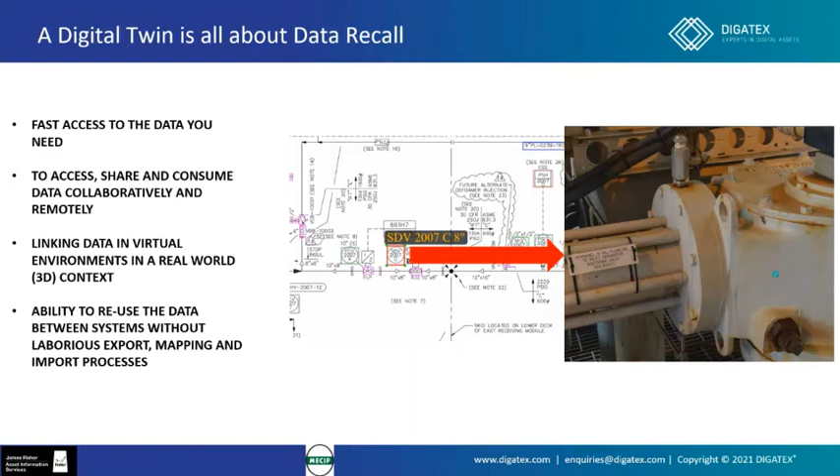So what comprises a digital twin? Out on our platforms and facilities we have a number of elements. We have drawings and documents. These drawings and documents are layouts, drawings, schedules, P&IDs, isometrics, you name it, we've got them, in multiple formats. But then we have databases and spreadsheets.

Engineers love building asset databases and spreadsheets. So you'll have hazardous area schedules, critical equipment schedules, alarm and trip schedules, etc., and all that data is normally in some sort of database.

And then we have a whole lot of 3D models, and these could be CAD models, where CAD stands for computer aided design, used by engineering contractors to design and build the asset. There's two huge benefits they get from it. Number one is space management, because they need to make sure nothing clashes when they get to site. Because if you've got a 12-inch steam pipe, it's very expensive to move it if it's going to clash with a piece of equipment. The other one is material management. If you can get the materials right, you can be very, very efficient during construction of the asset.

And of course, when you get into operations, this plant is changing constantly, and not everybody updates their CAD 3D model to as-built and then maintains it. So that's where technologies such as photogrammetry, which my colleagues Ruth and Nick will talk about later on, come into their own, where we can take a digital photo that can be used to find your way around the asset. And of course, there's laser scanning as well if you want the detail, and the technology's really moved on. We'll talk about that a bit later on.

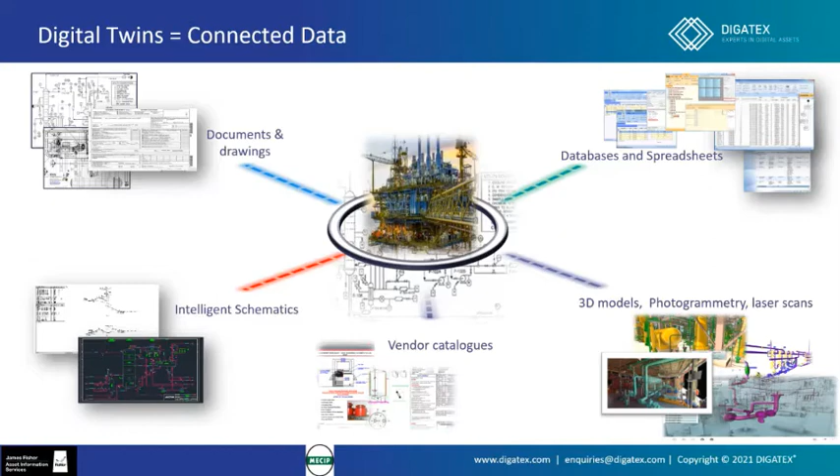And then we do, of course, have some intelligent schematics. You have intelligent P&IDs, intelligent isometrics, etc. So that's the landscape of engineering data, and some people will call that a digital asset. And what the digital twin does, as shown in the middle there, is it links this all together. But it's a massive challenge to be able to extract the data so you can create that linking. That's what we'll talk about just now.

But of course, once you've done that, it all feeds up into the overall digital twin of the asset, because you need to maintain the asset. And with that, you need to continually create work packs. You need to be able to tell people what you do. You need to group equipment together, and that needs the engineering data to be able to do that. Material master or equipment management is a really, really important part.

And we'll talk a little bit about duplicate items later on in the presentation. If you have duplicate items in your store, it's costing you more to store them. It's costing you more because you're going to buy more equipment, which means more equipment has to be manufactured, and that's increasing your carbon footprint plus your costs. So focusing on that, you can have some significant savings.

And then there's the engineering aspect. Engineers need to check, for example, if a pump has failed and that pump is obsolete, then engineering need to check to make sure that whatever's been proposed will do the duty and do it safely. Then there's the inspection. We see a lot of computer programs coming online now about 3D inspection management.

There's a lot of work being done in the risk-based inspection area, where we'd really like to be able to take an isometric and mark it up and say, here's an inspection point, here's all the weldolets, here's all the welds, these are the flanges. But when you've got dumb PDF isometrics, it's very difficult to do that other than manually.

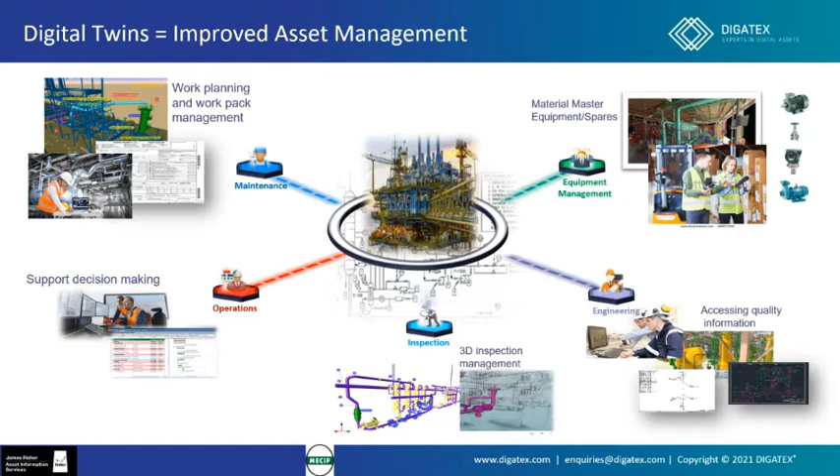We're with a big Malaysian operator this morning. They were talking about their 7D system. So things are progressing very rapidly in requiring granular access to data. Their question to us was, they've got thousands of PDF P&IDs - how can we link them into their 3D model so they can have smart access to their granular data? And we'll talk about how we do that just now.

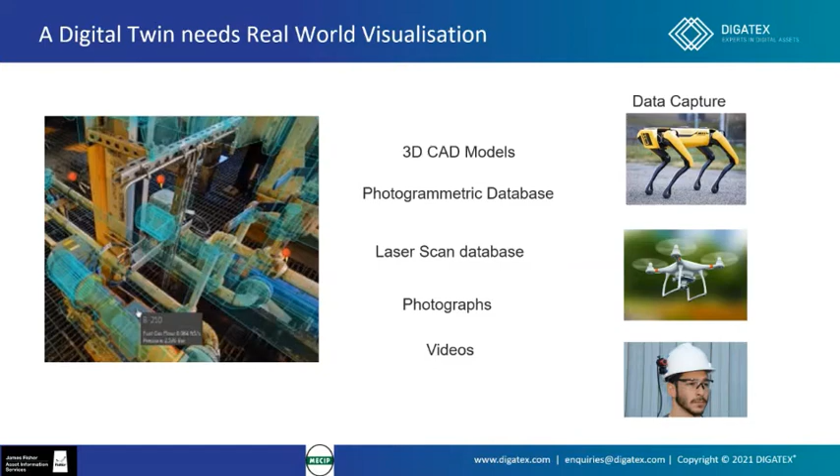And that brings us to photogrammetry. Why would we? That's been around for years and years and years. It's not a new technology, but there have been some massive advancements. We can now do acquisition very quickly, so we can capture a plant very quickly. The updates can be done by the operator, so you don't need to call back the company that created the photogrammetry model for you. But the big plus is it provides an as-built view.

And certainly I did quite a bit of work here in Australia with Woodside a few years ago. And what they found was that when they started looking at the photogrammetry model, they picked up safety issues. And that was a huge advantage to them. It wasn't designed for that.

They captured it in order to do maintenance, but they found there's a very good side benefit. And of course, with these operations or these plants being remote, it means that you can view this in your office or in your home as you are sitting right now.

And of course, we can now link the documents and the data to the 3D model, and we'll show you that just now. Of course, that gives a huge advantage, because if you're looking at this particular valve in the 3D model, photogrammetry model, you can click on a button and open the P&ID, the general arrangement drawing, or the loop diagram, whichever drawing you want to have a look at. And that's what brings it all together and makes it very, very good.

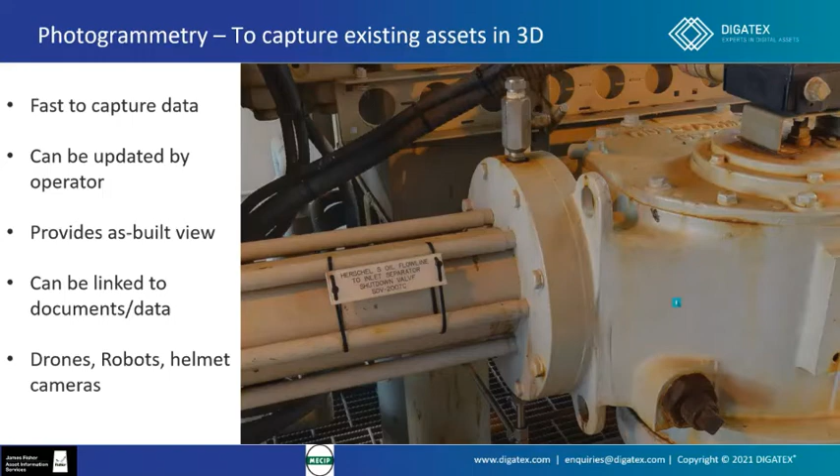And of course, with the latest technology, I'm sure Ruth and Nick will talk about it a bit later on, you can bring laser scans into this as well. So you can combine this all together, so you're not locked into a single technology.

So just as an example, if I showed you my mobile phone, you would look at it immediately and say, yes, that's a mobile phone, and it's an iPhone. Now, how would you know that? Well, you'd know that because you've probably seen one before, you probably even got one. And that's the same as what we're doing with machines.

We're teaching them, using artificial intelligence, to identify objects. So if you looked at a P&ID, you would look and say, oh, there's some lines, there's off-sheet connectors, there are valves, there are instruments, there's equipment. How do you know that? That's because you've seen it before. We're doing exactly the same here.

And machine learning is the subset where we use advanced statistical methods to speed up the process and make it much more efficient. And deep learning is the subset which makes the computational multi-layer neural networks feasible. Now that's very, very technical, and we won't go into it in this presentation, but it's certainly one of the techniques that we use.

All right, so what is the value proposition here? Because if we can't do anything quicker or cheaper, as we know from our opening slides, then we're not going to get approval to go ahead.

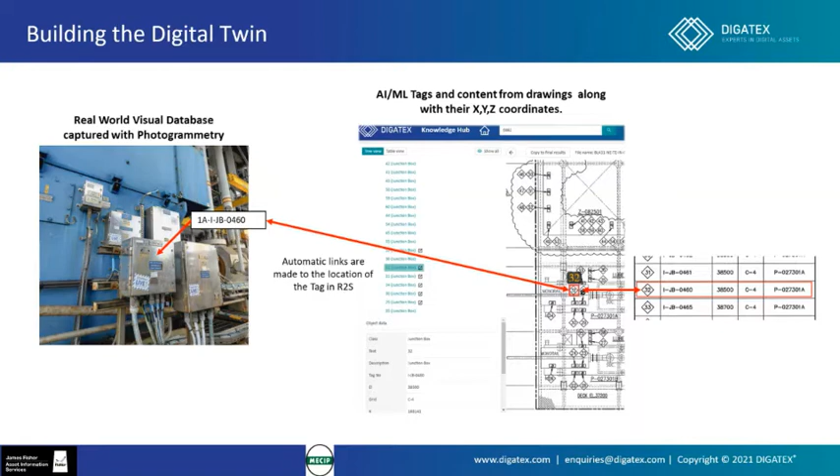We can also nowadays do this with P&IDs. So here's, for example, a shutdown valve, SDV 2007C, and you'll see on the left-hand side, in those square colored boxes, what the machine has identified - the shutdown valve, a flow control valve, the lines, all the objects it's been told to go and identify. And that could be a scanned image, a dumb PDF, a JPEG, any format you like. If it's an intelligent PNID, well, then we've got more data we can use, but it doesn't have to be.

And on the right-hand side is an image of that shutdown valve, the same one, SDV 2007C. So you can see now, you can go very quickly, start off in the Photogrammetry 3D model and go back to the PNID, or vice versa.

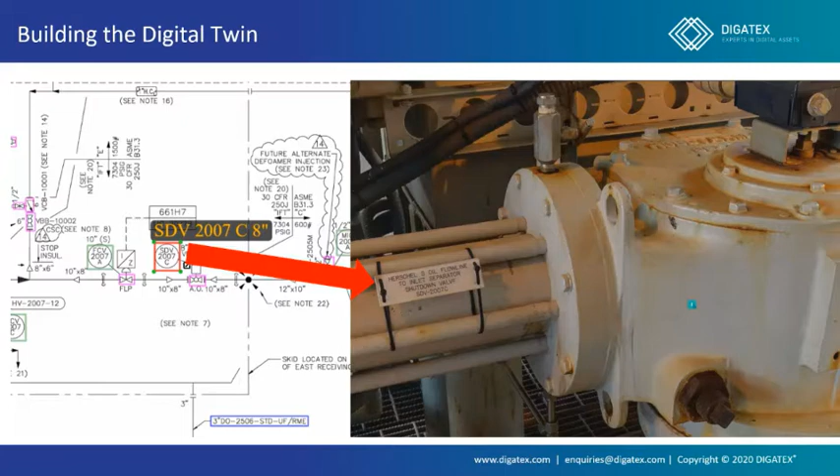Now, this is a really important slide, a very simple drawing. It's called an isometric, and it was just a dumb PDF isometric. You'll see in the top left-hand side that the AI platform has detected welds, weldolets, elbows, lines, off-page connectors, etc., and flanges from this dumb PDF drawing. You'll see that callout where the machine has identified that flange because it's been taught how to do it. It's identified the endpoint, so we can navigate to the next drawing.

You can even put inspection points onto this dumb PDF isometric and number that inspection point as you wish. And here's the crux of it all: the AI platform has extracted that data. So we've taken an unstructured PDF document and created structured data. You can see there's the fluid category, the diameter, the area, etc., all held within the database in the cloud. So we can now repurpose that data, for example, to go and do inspections, to go and do maintenance, do whatever we want to do.

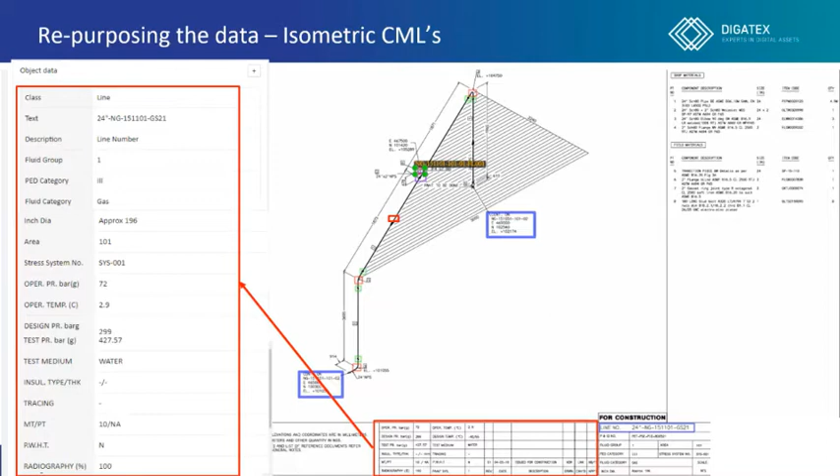Here's a case study taken from a major EPC, Wood, where phenomenal savings were made. This is a really tough project that they had executed in the Middle East, and they came to the end of the project, and the client wanted all the data into their smart system. Of course, all these drawings had been done over many years because there was a lot of unrest in the area and multiple contractors had been involved. There were different tagging systems, so it was very complex. They had estimated it would cost $370,000 US to carry out this piece of work to extract the data, and the time they expected to take was about 50 weeks. Using AI and machine learning, it was executed in 4 weeks for a lot less money.

Another one from Wood is this one, where this is a PNID once again, and you can see the colored boxes is where the AI platform has identified items, using artificial intelligence to find those items. But more importantly, if you look in the bottom left-hand box with the red square around it, you'll see that the machine has said, this is a pump PBB 7305, but it's also got some data in a table at the top, so I'll extract that as well. So now all together in the database underlying the AI platform in the cloud, we have the tag number, the description. It's gone and looked at the symbol library to say this is a double acting diaphragm pump. We've got the capacity because it says so in the box at the top, and it's got one spare, and the material is stainless steel.

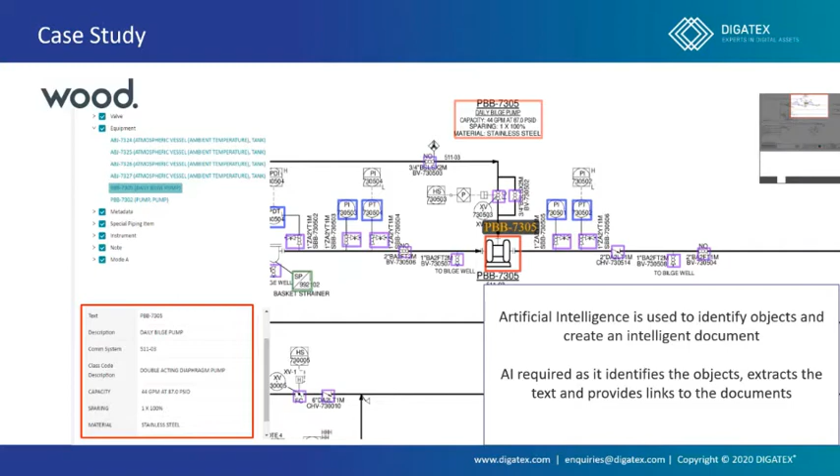So what we're doing is taking this dumb data and making it intelligent and making it available for reuse. That's real, true digital twin availability.

Material master data is notoriously difficult to search because the material master data in the ERP system is normally just text, free text search, which has got commas or semicolons or hyphens between it, and is very difficult for the human to search. So we have used our AI platform to enable finding of duplicate entries.

For example, the top 3 entries there, I've just hidden the operator names for confidentiality reasons, but the top item has got a part number, which is in the middle column, and you'll see that those 3 items all have the same part number. So now you've got the opportunity to say, well, if that's the same operator, those items are actually duplicate items.

And that's really, really important because duplicate items are very difficult to find normally, but they're very, very expensive as well. You've got to store them, you've got to maintain them, you've got to count them every year, and it means that you're ordering excess stock. It's a huge opportunity for cost saving.

And also the ability that it gives you is to be able to share spare parts between operators. Australia is doing this between Chevron, Shell, Woodside, Inpex and Santos. The UK have started with Spirit Energy coming on board, BP, and a lot of other operators are looking into this as well. So huge opportunity to drive down the cost.

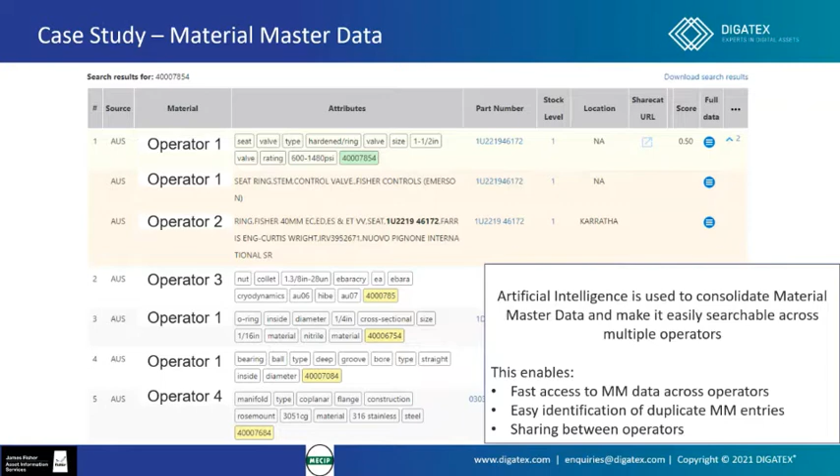All right, so that leads us on to the linking of the digital twin to the 3D model. And I'm going to ask Ruth now to talk through the case study, real life case study using a tier 1 operator where significant benefits have been achieved. So over to you, Ruth.

The support teams for these assets were onshore in Luanda and in the UK, and physical access to the site could only be carried out via routine boat trips at certain times of the week. Levels of people on board were limited by bed space, as is usual, and like everyone else in recent times and through all of last year, travel was further complicated by COVID-19 restrictions.

So as well as these travel and access challenges, there were also challenges around the vast levels of unstructured but valuable data and disconnected management and operational systems. This meant that a lot of time was spent looking for information and then ascertaining whether that information was actually accurate when it was found. Can we move on to the next slide, please, Richard?

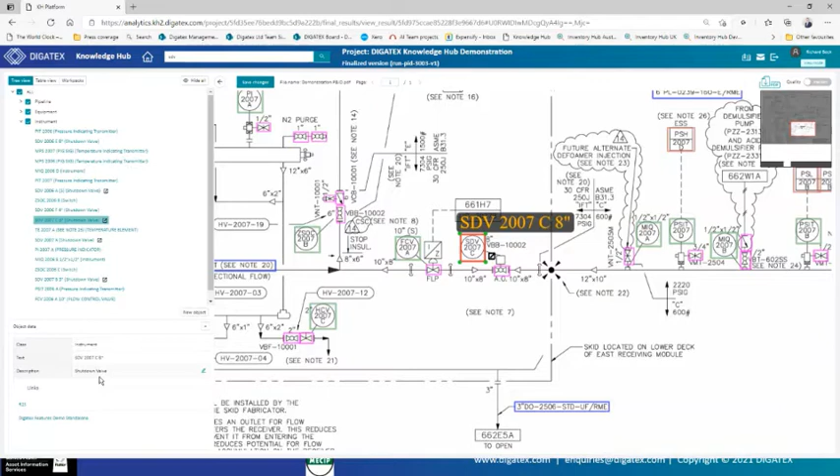In this case, we've just extracted 3 pieces of information. It's an instrument, that's the tag number, and the description. We could, of course, extract a lot more data if that was required.

And then what about repurposing of the data? Well, here's an example of a work pack, a very simple work pack that's been put together to go and maintain this particular item. And what we can even do is allocate parent-child relationships.

So there's the parent in the purple, I'll just zoom in a bit, and those are the 3 children, which gives us fantastic capability using a dumb PDF drawing to be able to go and find this information so quickly.

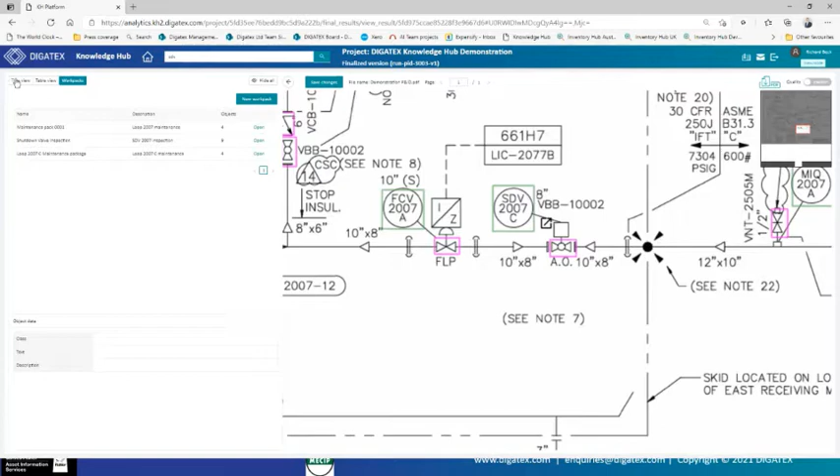So if I go back to that valve now, I can actually have a look at this within the 3D model, because I would have now understood what's going on in the PNID, or maybe I want to look at other drawings. As you can see, if I click that button, you can see everything that's been identified by the AI platform. And I can click a button to download an intelligent PDF if I wanted to use it on site.

But what I can do is click on this button, and it will open up the 3D model, photogrammetry model, and it will zoom to that particular item. You will see that's SDV 2007C.

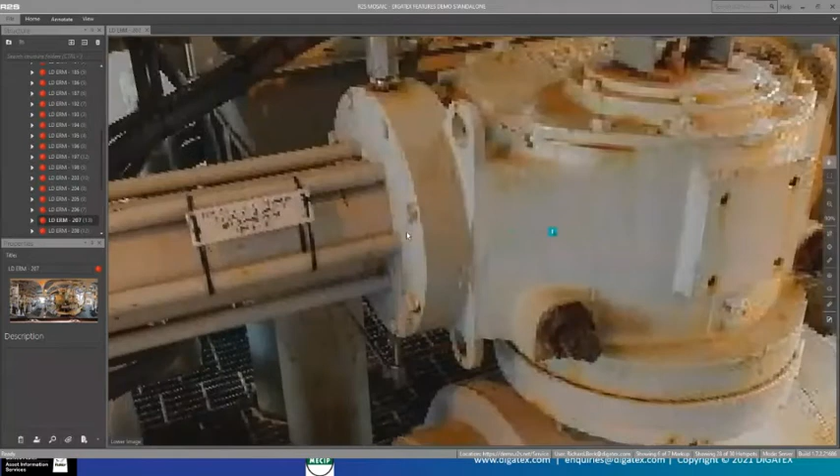Now, the advantage of this is that this is really as built. This is what's out there on this platform right now. And you can see the quality of that text - you can read that nameplate very, very clearly.

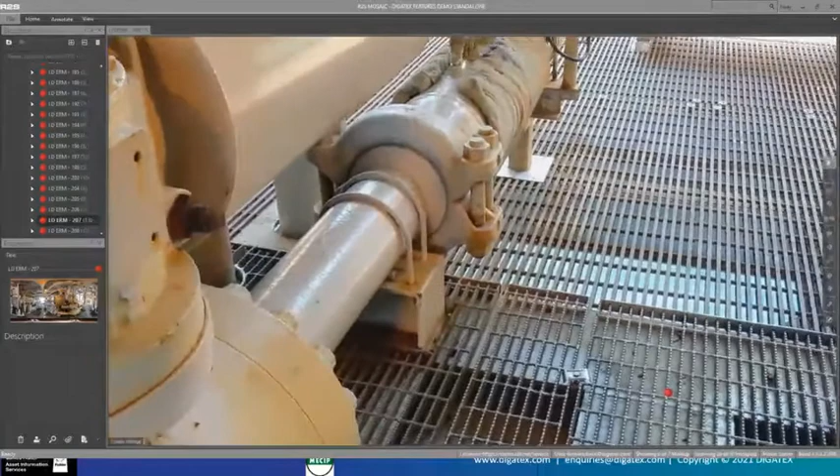And I can now zoom around or swing around, and I can have a look to see, oh yeah, I've got some laydown area to lay down this big heavy valve, and what level it's on, do I need a crane, etc. So that's showing you going both ways - you can go from here back to the 2D drawing as well, which Nick will show you just now. But that's very quickly showing you the power of the digital twin.

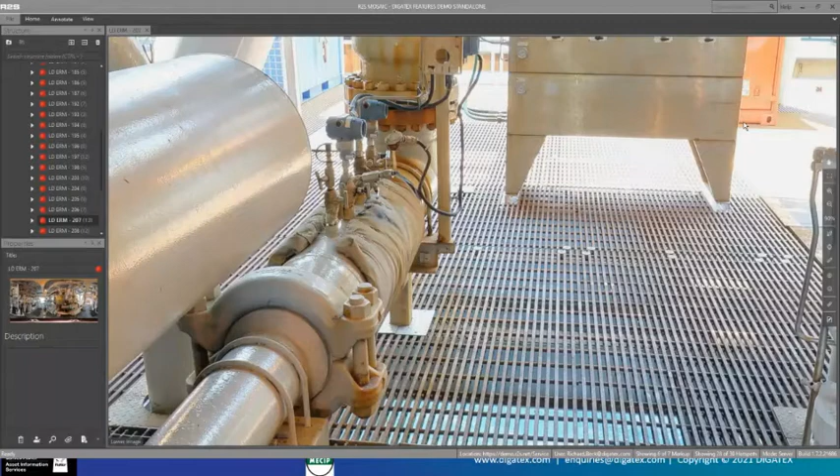So for the last part of this webinar, before we go to the questions, I'll hand over to Nick to wow you with some really, really impressive 3D technology.

Thank you very much, Richard, and hello to everybody on the call. I'm just going to share my screen.

So yeah, what I'll be doing today is just giving you a quick demonstration of some of the different sort of capture methods and functionality that you can expect within a digital twin.

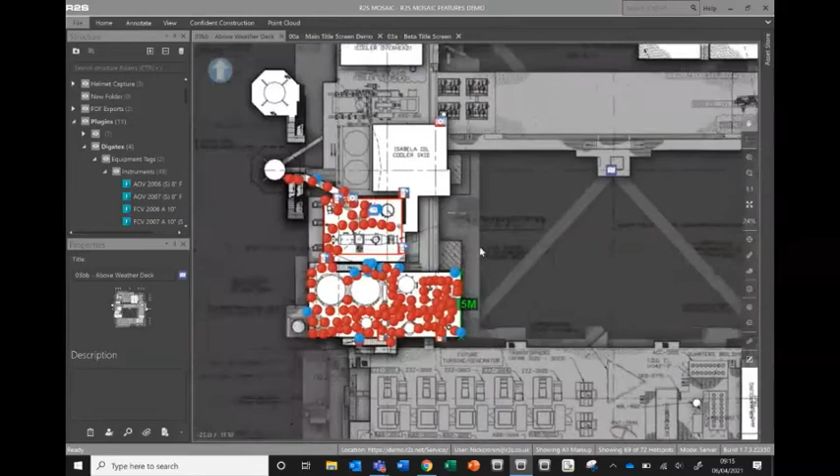In this first demonstration, I'm going to be moving through this main window here, and I'll be displaying photogrammetry and what that sort of looks like. So in this first example, we'll be moving through these red spots on the deck as I hover over them. You're going to get the pop-up window that gives you an example of what you're going to be looking at.

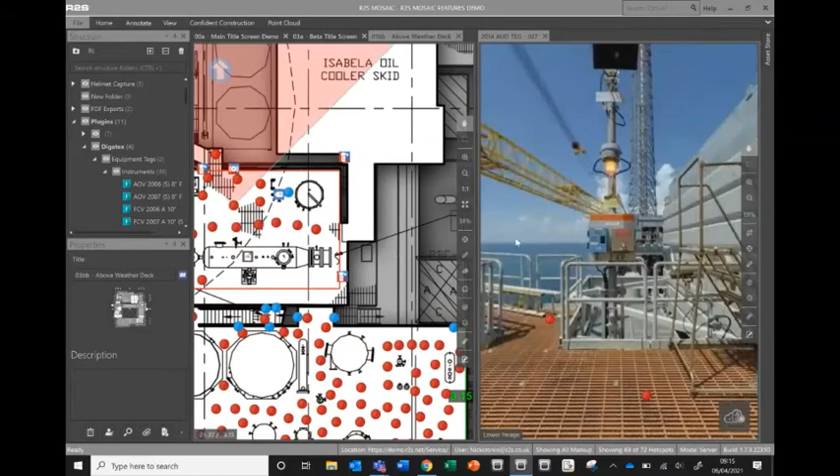Now, each of these points is a 360-degree image that's been captured on the deck of this facility. So we click down onto it, the screen is going to split into two. On the left-hand side, we have the top-down plot plan view, and on the right-hand side, we have the photogrammetric capture. So in photogrammetry, one of the main advantages of this capture method is the extreme quality of the image.

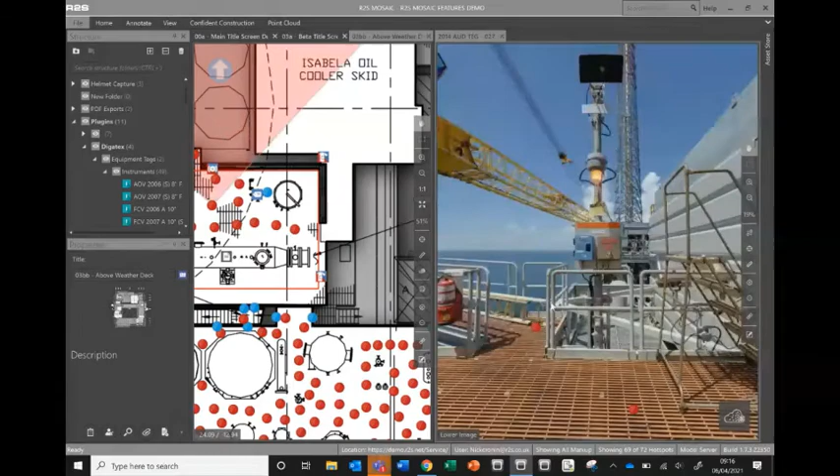You've got great depth of clarity there and the ability to read the signage and the text as we come in and out. The images are also captured at multiple exposures, so you're going to be able to change the brightness in either extremely bright sunny days like this, for example, so that it's not too washed out with the sun, or in a dark area as well. You're going to be able to increase or decrease the brightness to get a better look at the area that you're working in.

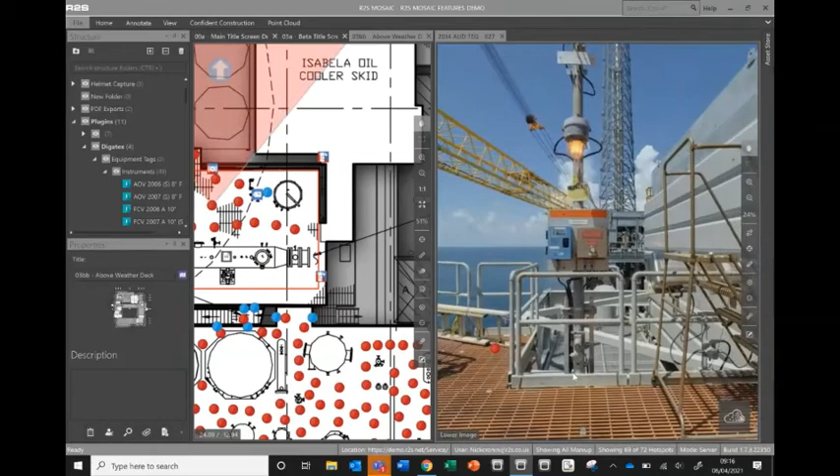So again, the ability with photogrammetry is to really give operators the sort of extreme depth of knowledge and immediate clarity on the site that they're going to be working in. It's great for familiarization purposes, getting to understand a site, or perhaps being able to completely avoid a trip at all by being able to visit and walk around in that full facility without ever leaving your office or your home space.

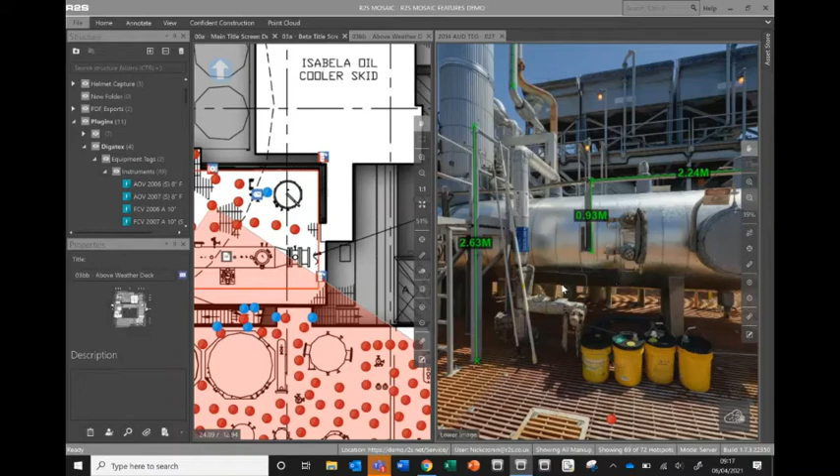One of the other benefits of the photogrammetry method is that you have the ability to take measurements within the images. This is possible because each of these red points is actually one image on top of another. You'll see here as we toggle between the lower and the upper image. Because we know the difference between one image and the next, we can create points within the image and then draw lines between the two of them to give you an estimation of the distance between the two points.

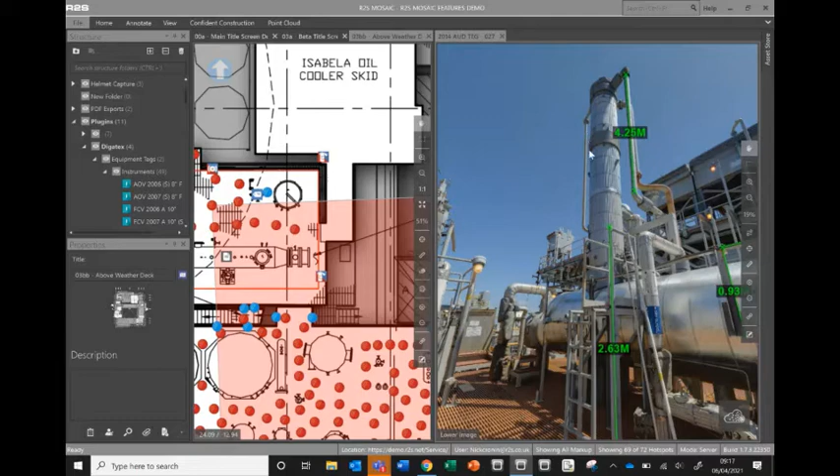Again, this is going to be useful in the creation of work packs. If you're going to be moving equipment around the site and you need to work out if it's going to be able to pass through a certain space, if you need to work out a specific laydown area, as Richard has suggested, or indeed if you've got a measurement that could be either hard to reach or impossible to capture otherwise.

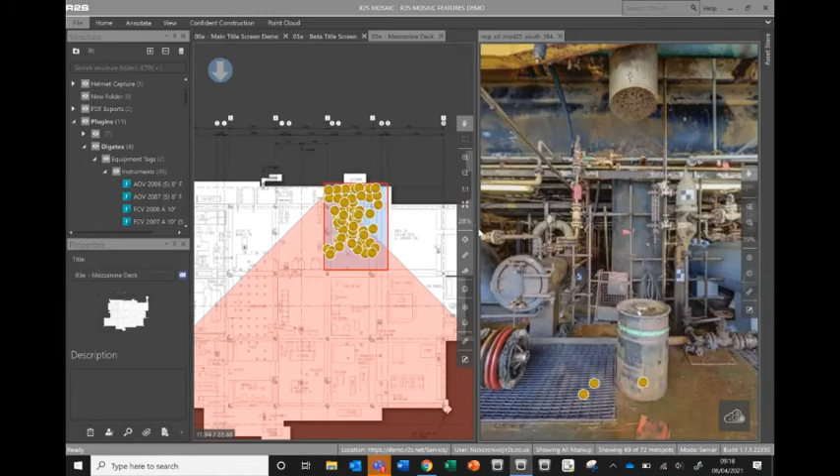Now, that's just an example of the photogrammetry idea, but within the digital twin, I understand that operators don't want to be tied to one specific data set. So you've also got the ability to build in the laser scan data as well, and point cloud viewers as well. So now as we click down onto these yellow spots, I'll be able to just talk you through these.

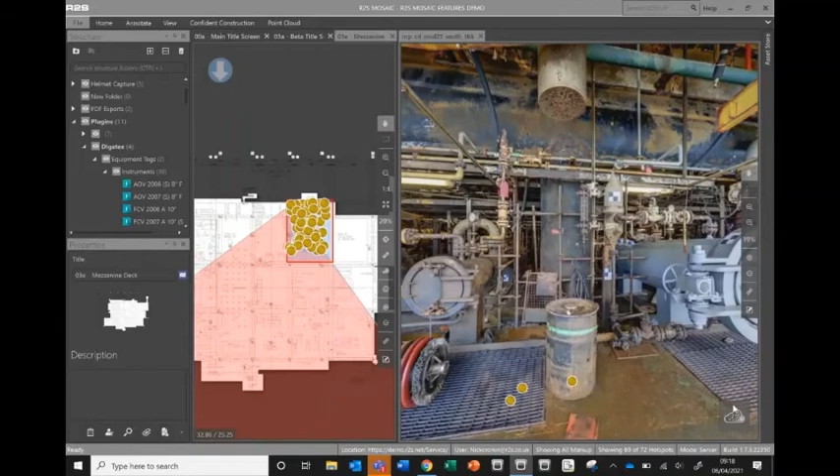So this is an example of a laser scan survey that's been carried out on an asset. Now as the laser scan is being deployed, the camera will take panoramic imagery, and this can be built into the digital twin to give you a viewpoint similar to the photogrammetry that we were just looking at. And then this can also be built in and compared with the point cloud data that has been pulled out of the laser scan. As I click on this icon just down here, we're going to get the image popping in within the digital twin, and you'll see that start to auto-populate there.

So then in this situation, you've got the best of both worlds. You have the freedom of movement and the ability to measure within the point cloud here. And then you've also got the clarity of the image from the panoramic viewpoint that's been taken as well.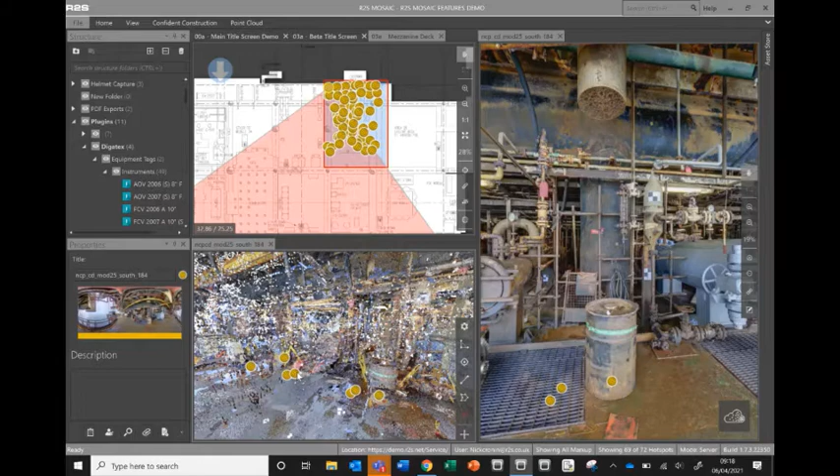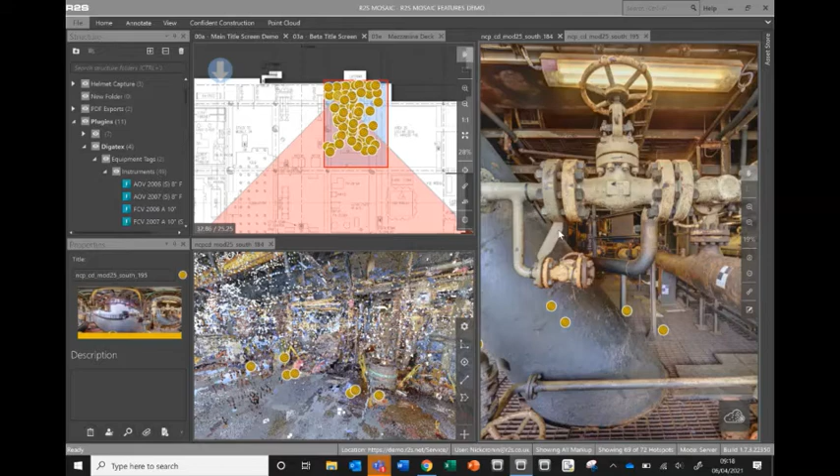You'll see as well that the points that have been captured are available in both, and as you click through them, the point cloud will open in the same location as the spherical as well. So it allows you to compare across the two of them. If you've got two screens up whilst you're working on the asset as well, you're going to be able to look at both of them and have the ability to compare through the two.

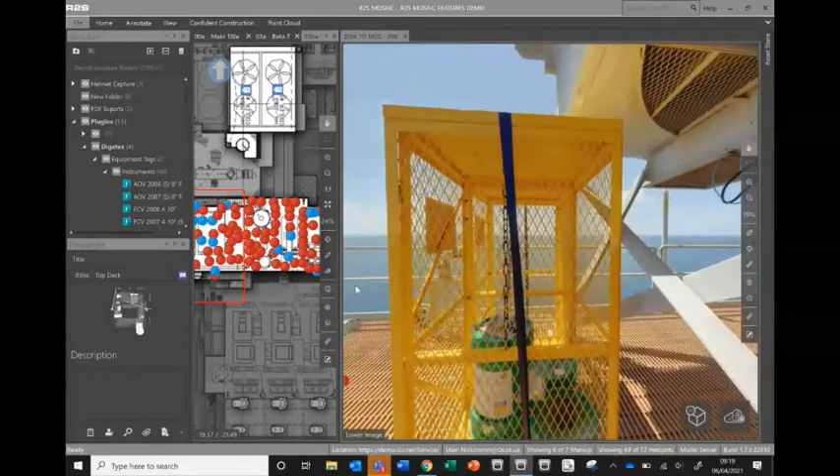Another example of data sets that can be brought into a digital twin is the ability to work with 3D models. In this example, as I rotate around the photogrammetric image, you also have the functionality of being able to overlay the 3D model into that, if there's an XYZ coordinate set available.

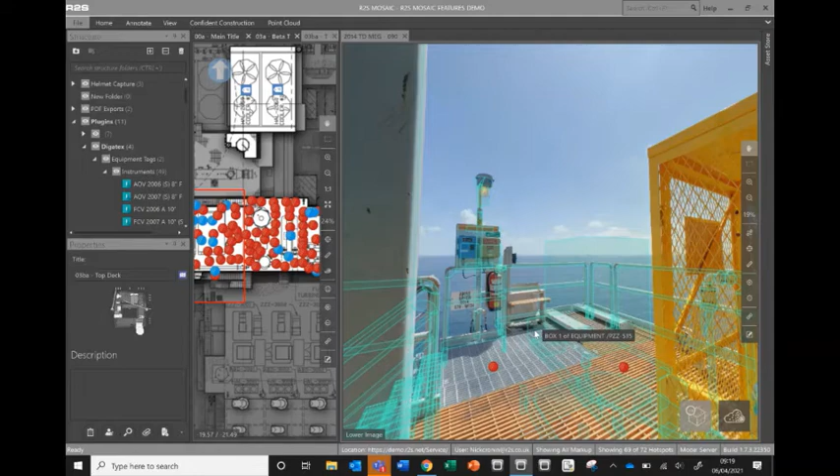What's happening here is that the 3D model is being pulled through and the intelligence is being overlaid onto the photogrammetric image. As I hover over each of the individual parts in the 3D model, it's going to pull through that information, and you're able to compare and contrast the knowledge with what's in the image. So you've got the number tag here, ESD 86300, and you can see that comes up on the tag as well.

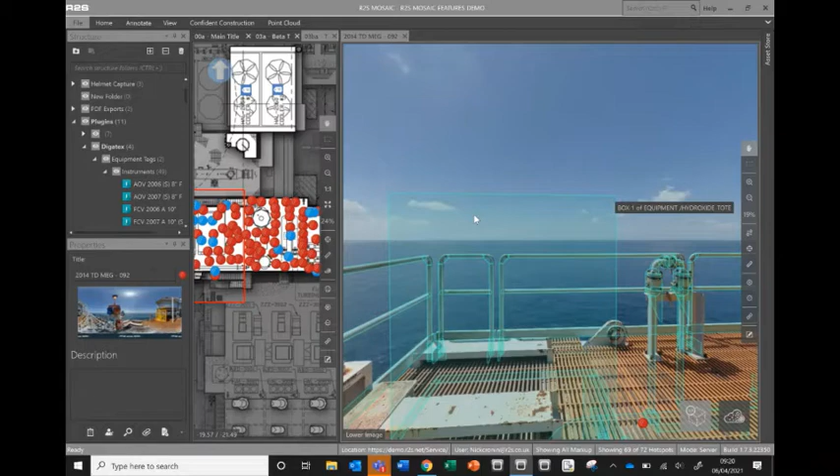This is useful because it allows you to compare and see the as-built environment against what you have in the 3D model. For example, here there's a box of equipment that has either never been placed or has since been removed, and by comparing against the actual as-built model, you get a greater depth of knowledge.

Within the photogrammetric options for the digital twin, and indeed the laser scan, kits can be provided that allow operators to capture individual elements and areas of a site, which means there doesn't need to be a full deployment to keep the model evergreen and give you confidence in what's being looked at within the digital twin.

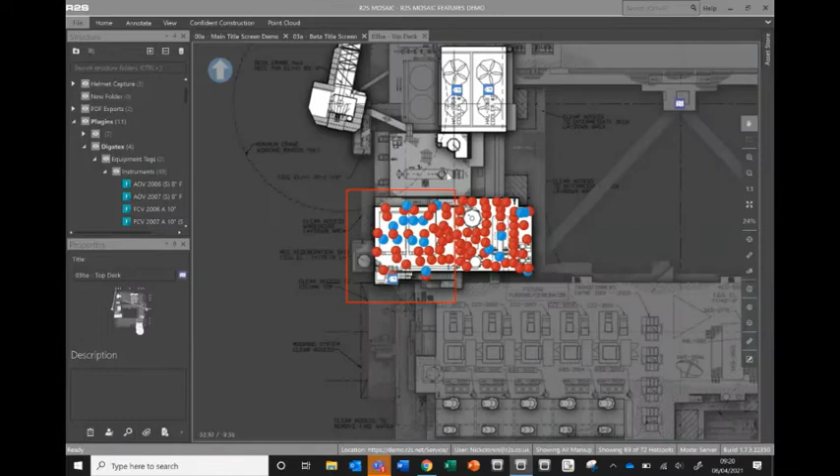But the real benefit and ROI of the digital twin starts to come back when you're able to build in more intelligence and information into the images you've got there, and that's when it really becomes invaluable in creating work packs and increasing familiarization within a site.

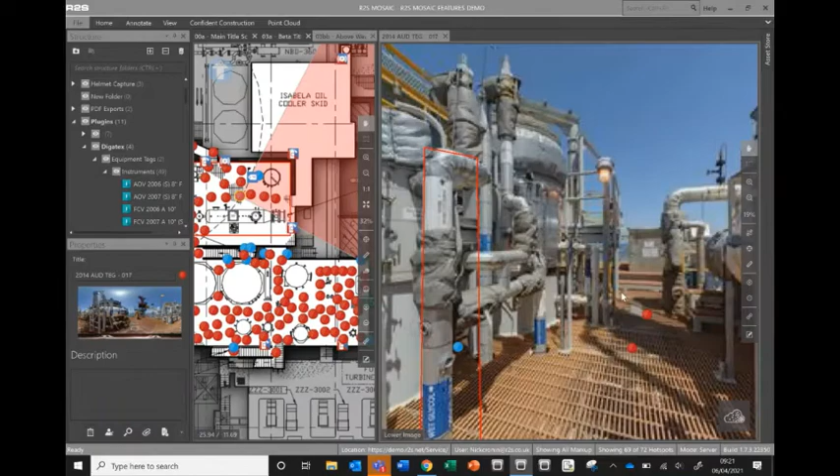This is available in a number of different ways. If I jump into this one here, we should be able to see an example of the annotation tools available. If we go up to the top tab, there's a range of annotation available from line to shapes to text, which can be brought in and then easily pulled out in a screenshot or a URL link and put into a work pack.

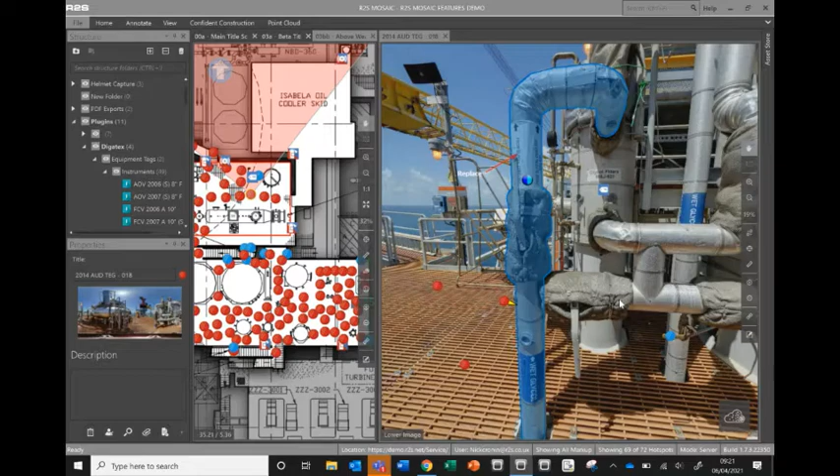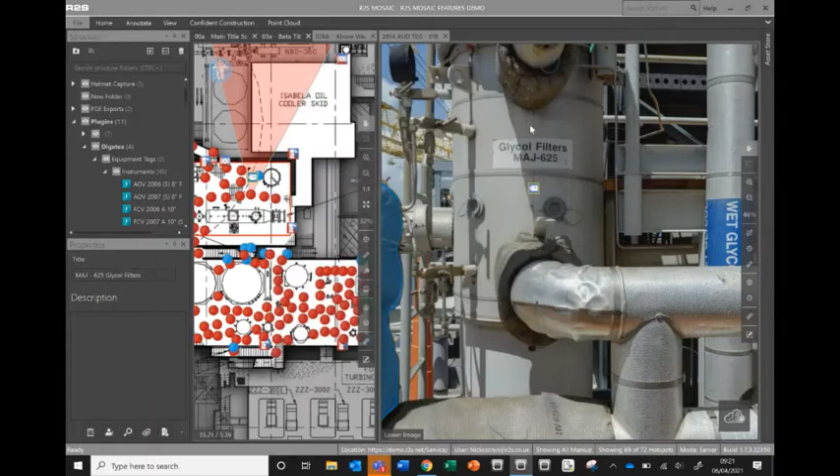That can then be shared with anyone else in the organization. You'll also see here an example of the tagging system available, which can automatically be placed within the images, with relation to coordinates and an XYZ system, which can then be populated with any relevant information, for example attachments relating to inspection reports or anomaly reports, so that anybody within the operator's organization can automatically pull up any information associated with that piece of equipment.

Including this, there's a number of plugins that can be available within the digital twin, for example a live data feed from the Pi database. As we hover over here, this is a signpost to the external Pi database, which is pulling in the live data feed and overlaying it over this meter, giving you that depth of knowledge and understanding of what's happening on the site without actually having to visit and be there yourself.

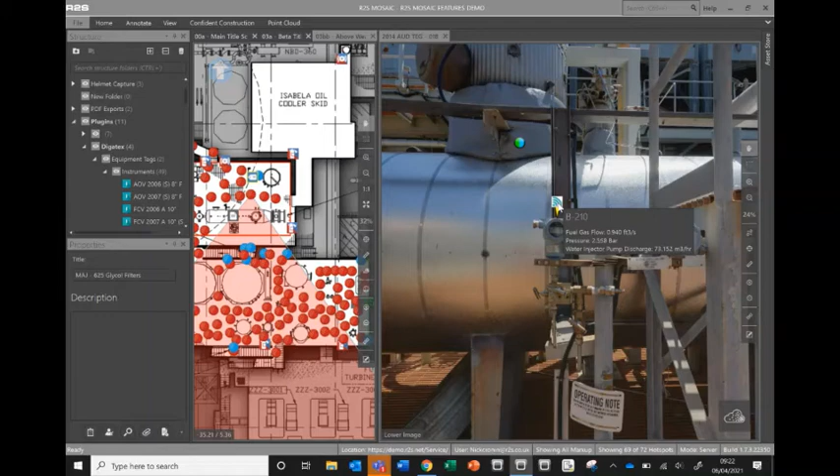As a final example of different data plugins and integrations that can be brought into a digital twin, I'll show you the Digitex example. If we rotate around to this piece of equipment, you'll see the tag, or the writing on it, is AOV 2007, and this Digitex tag has been placed onto there.

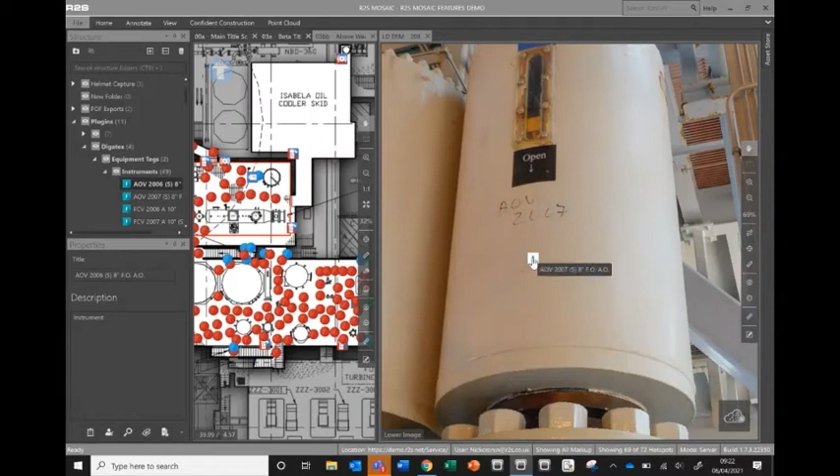It will open up in the same way as the tagging system we were just looking at, and it has the link here for the Digitex Knowledge Hub system, which we can click onto, and it will automatically open up the associated P&ID and zoom into that particular point.

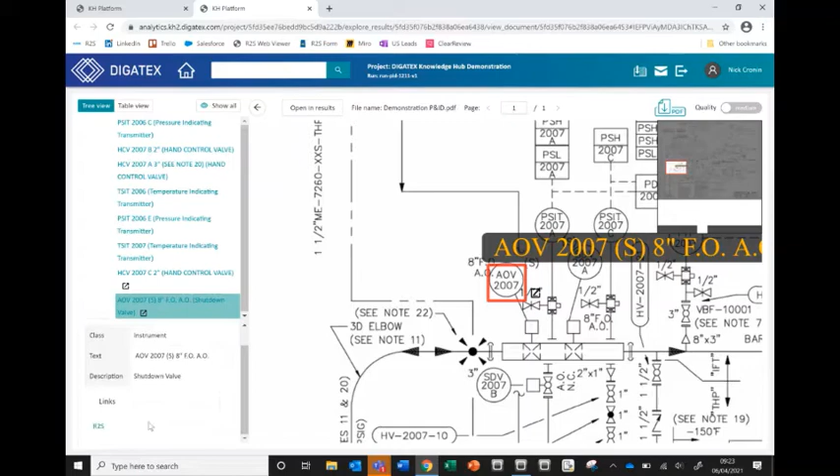And then what you can see down here is the reciprocal R2S link. So if I just close this one down and go back into the Knowledge Hub system, onto the R2S link, we can click on there, open the client, and it's going to open up the spherical point within the R2S model and auto rotate around to that piece of equipment again.

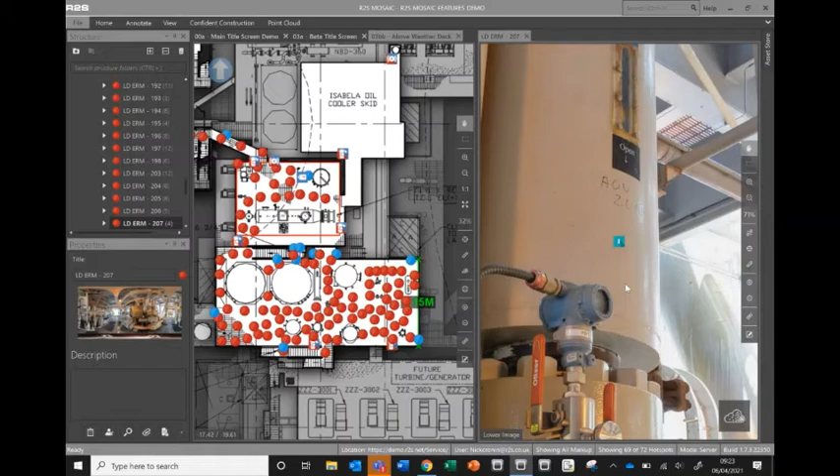Thanks, Nick, that was amazing, very impressive. So I think what you've seen here today is an overview of digital twins, what they're all about, what the benefits are, and how we can provide significant benefits to the operators and EPCs as well, and a demonstration of what's available right now.